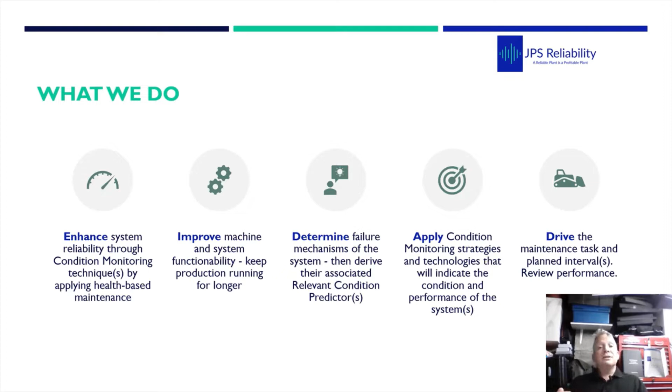To do that, we need to determine the failure mechanisms in the asset and what their associated condition predictors will be. And once you know what a predictor is, what technologies can you use to detect those indications of failure? And we use all that to drive the maintenance of proactive tasks to ensure that production is kept running as sweet as possible.

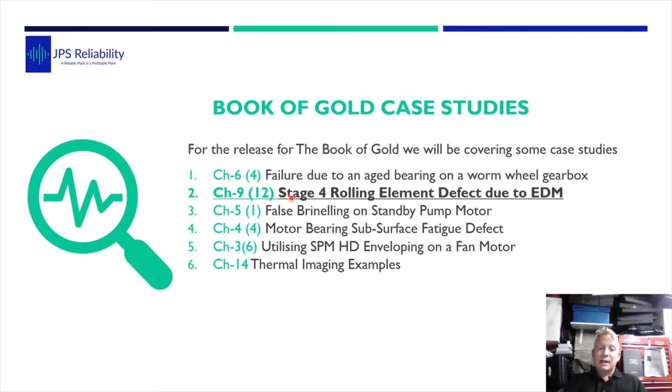These here are the 6 case studies in this series we're doing with RMS. Today is case study number 2, as I said, chapter 9, case study 12 in that chapter, and it's stage 4 rolling element defects due to EDM. This is just a stock image of a generic pump set.

So basically at this particular site, operations had noticed that the pump sets weren't sounding as normal. Bear in mind these have been in for a few years, 2, 3, 4 years, and they're on variable speed drives, and this is the first time the operators have noticed they sound bad. So as a gradual deterioration, they didn't really pick up the noise change till it got really bad.

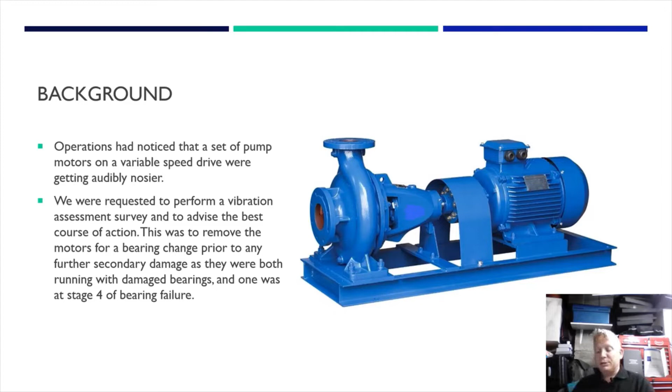When we actually inspected that bearing, so we got the NU bearing, the outer race signal, and what you can see here, these lines down there, that is the length of the rolling elements. So as the rolling elements are coming by, you got that discharge in the bearing. The top here, the balls, which we showed you earlier, these were frosted in colour and they had fatigue amazingly, and they've all started to crack and fatigue and come up. So this bearing's been in for a while.

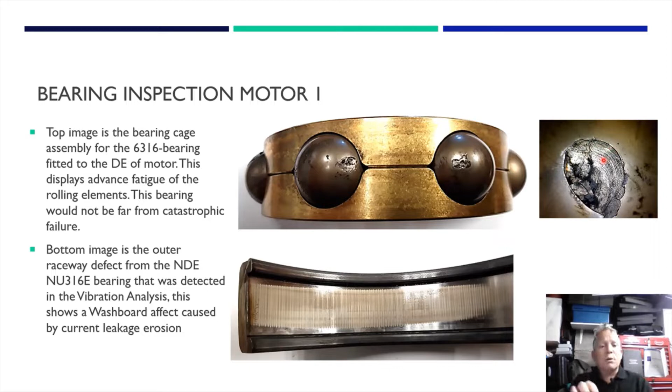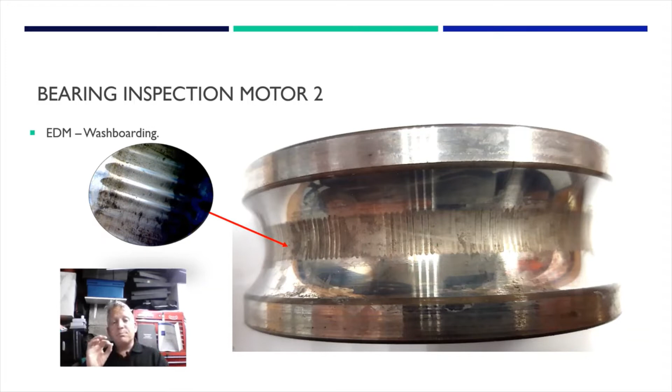So the findings from this little case study were, following on from the asset assessment, they were removed in a controlled manner, so it didn't affect production and hence the bottom line, and it was the correct decision as we could see the bearings were close to catastrophic failure. Motor 1, the non-drive end bearing, 6316, had considerable spalling as we saw on the bearing I showed you, and the other bearing had EDM on it across the ball rollers. Motor 2 had indication of EDM on both the outer and inner bearing.

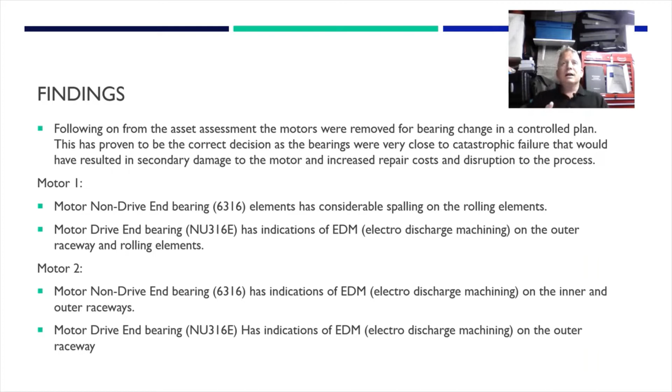So with variable speed drives, this shows you that not one motor is the same. Not one motor in the same plant, duplicated, is the same. There's so many variables in the installation and the incorrect installation of the earthing and the ground and the high frequencies, even back to the transformer. It's a big subject. So you must remember, always take each case as a new case. Don't think it's going to be the same as the other. It's chapter 9, section 12.

With all of our case studies, we have sort of like a background, your findings, and then obviously the vibration data and stripped down images. So in this particular one here, the background was this was a process plant water pump motor. They had a variable speed drive on it for quite a few years, and obviously they didn't notice a change in pitches over the years, but one day they came in and it sounded quite bad.

So we were called to do an asset assessment. So we did a vibration assessment and we said clear as day, high risk damage, stage 4, you got EDM damage from the high frequency switching on the drive going through the bearing. You'll see in the book we have some vibration data as PeakVue data.

We got the stripped down images, we got the failure mode, EDM damage. There's a roller there, you can see like a washboard effect, and because there's a roll there it's actually longer across, and these are the rolling elements which I was quite impressed with how fatigued they were. And on the third page, we have another data. This is now showing us the inner race defect, and we have the lovely washboard pattern on the EDM.

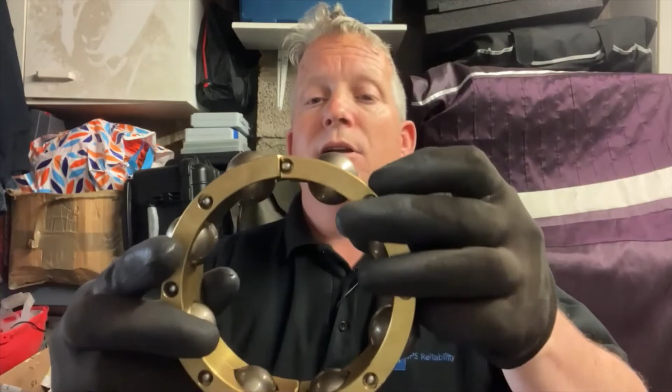Now we actually have that bearing here, so I'll just quickly show you the bearing up close. So it's in 2 halves, cut in half there, so it's a reasonable size bearing. And what was very nice was you can see on here it's sort of like a muscle, sort of misty color, obviously as the current passing through, but this had been there for so long that it fatigued, and we got some lovely cracks there on all the elements. Beautiful fatigue. So this is just age related fatigue. Obviously the driver behind it was EDM discharge through the bearings, so you can see there some lovely defects.

We are seeing EDM defects a lot more lately. We'll do a few more videos on other case studies for EDM, but this was quite a simple one. So we went there, did assessment, we could tell what caused the defect, what the defect was, what the bearing failure was, and now we're helping them to rectify so this doesn't happen again. And look, there you go.

Well, I'll just go through one thing. I don't know if you know this. So when we're measuring bearing defects, we're sampling to pick up the period of the defect signal from the bearing. So we're sampling, and if we sample fast enough we could pick it up. With most analyzers now we got the PeakVue Plus, SPM HD enveloping as well. They sample super fast, I'm sure it's like 20-40 kilohertz. So we're broaching the ultrasound range. So the faster we sample, the sooner we'll pick up a defect.

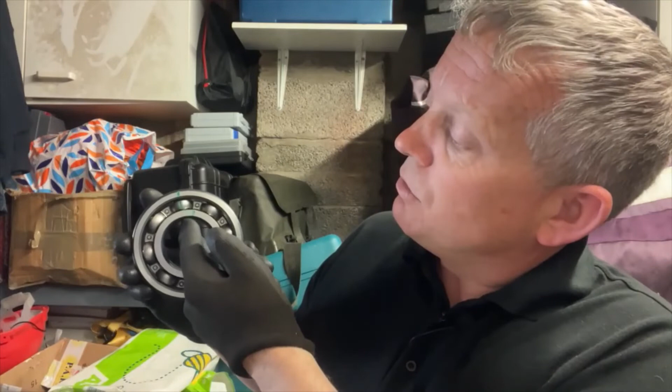And just to get people understanding where the defects come from, if we look at this bearing here, I've put a line straight down there. So to work out an inner race defect, it's as simple as the period of the defect signal passing the inner race and the rolling elements. So if we count how many rolling elements this imaginary defect will hit, we've got 1, 2, 3, 4, and nearly 5. And I wrote down the defect, so this one is actually 4.9 orders. So that is how we pick it up there. Cage, as you would expect, is about 0.4 order.

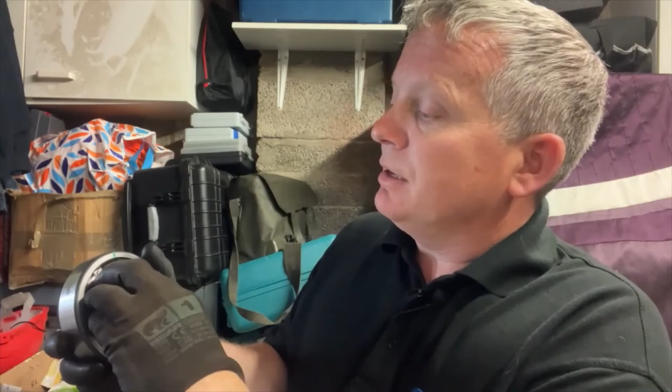So to prove that, we look at this mark on the cage and see how far that mark on the cage goes around when we move the inner race for one revolution of the shaft. So as we move it around like this, there we are, that's one revolution of the shaft, and our cage has moved there, so like 0.4 orders. If we bring that back together,

we can do the same for the outer race: for one revolution of the shaft, how many balls pass the imaginary defect on the outer race. So if we go there, 1, 2, 3 and a little bit, and the defect frequency for that is 3.04. So that's just a little visualization to help you understand. When we pick up a bearing signal, it's not like a frequency, it's a period we're picking up of a pulse of energy from a bearing.